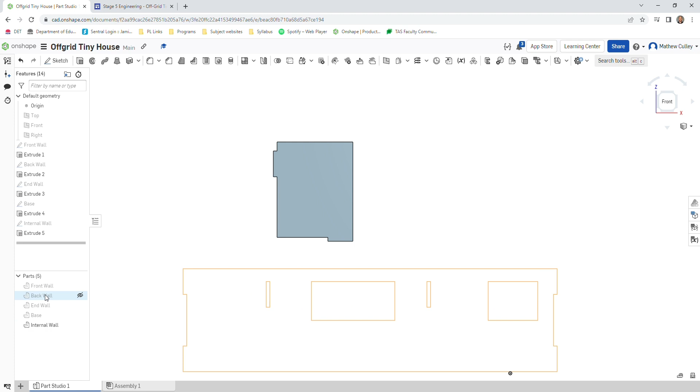So you can see our 5 parts here: our front, back, end walls, our base, and our internal walls. We're just going to come over to our assembly studio down the bottom here and left click once.

Okay, we need to insert our parts first so we can assemble them. So left click on insert. I can select these parts individually, or I can select my entire part studio. So I'm just going to left click once on part studio and bring all my parts over here to the work plane.

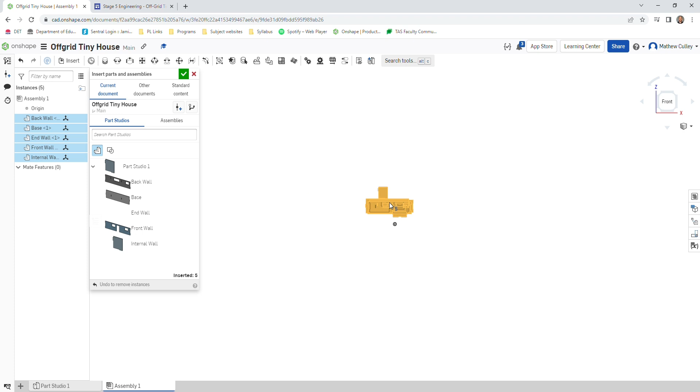Okay, zooming in. Now it's given me one of everything, and they're all stacked on top of each other.

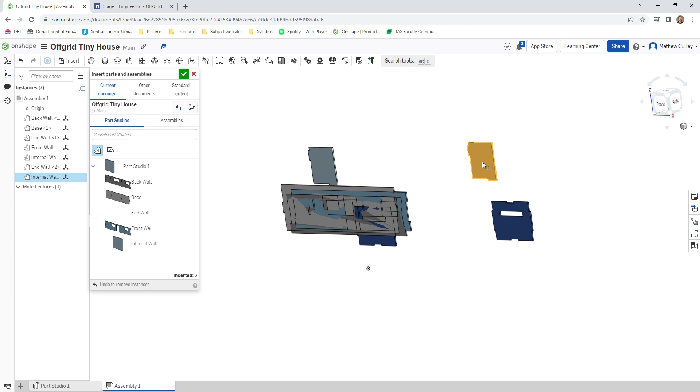We need to add in an extra end wall because we need 2 end walls. So I left click on that once, left click over here, and I need one more internal wall. So left click and left click again. I can now click my green tick, and I now have all my parts necessary for my assembly.

To fix this up here, all we need to do is click and drag on each individual part just to separate all those pieces. Okay, and now we're ready to start assembling.

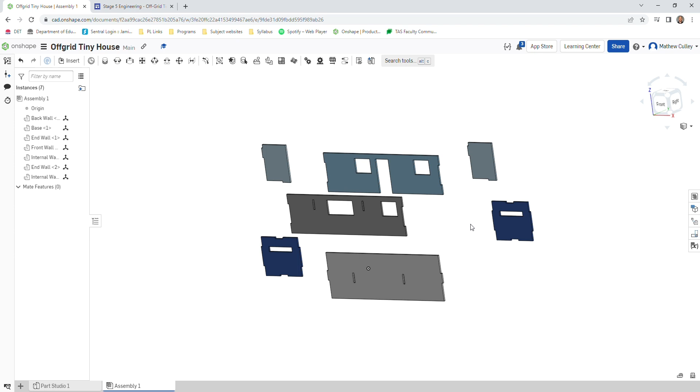Before we start joining all the pieces together, it's good to get everything into a rough orientation. So we need to turn our end walls around so they're facing the right way. If I just left click on one of my end walls, you can see it brings up these arrows and these direction tools. So I want to rotate my wall around this way.

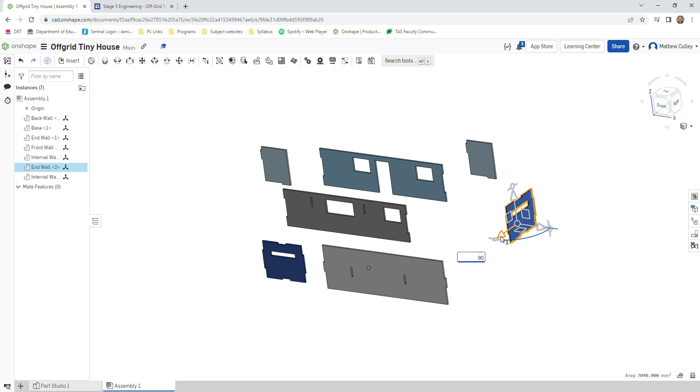I will left click and hold on this little circle here, rotating around. Now you can see it gives me the degrees. I want to rotate 90 degrees. Now if you can't quite get it on there, that's okay. If I just release my left click and press 90 degrees and hit enter, it will snap it into position for me. Left click away, and there we have it.

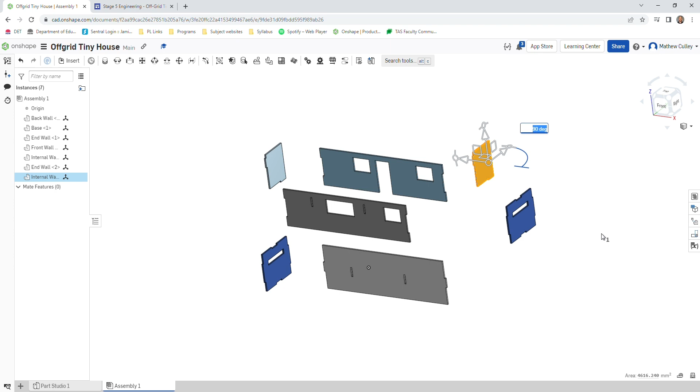I will do that for the other end wall, and the same thing with my internal walls. Okay, and then my base here, just going to rotate around 90 degrees, and I'm ready to start to assemble.

So we're going to use a series of fasten mates which can be found up here on the toolbar, or M is our shortcut for our fastening mate. So first joint we're going to join this corner, this end wall to our front wall.

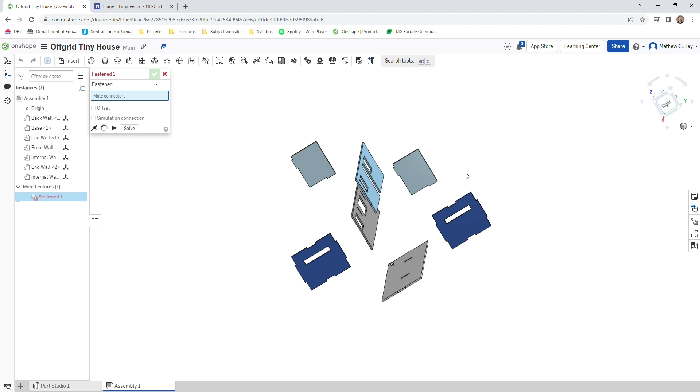So I'm going to zoom right in here, double click on right, zooming in on this corner, and you can see my axis coming up, so the blue, red and green lines. I want that blue axis pointing upwards, so left click while it's pointing up, zoom back out.

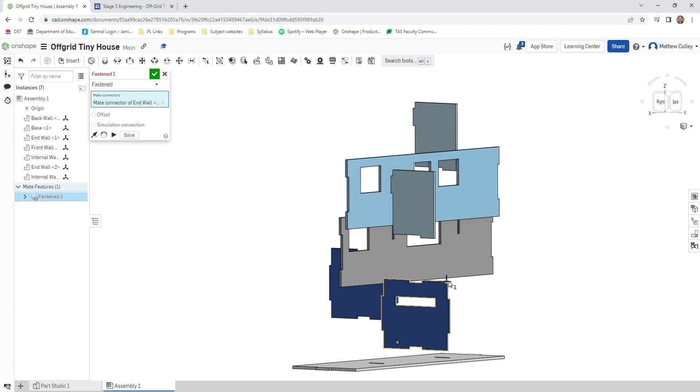And I'm going to join it onto this corner here of my front wall. Left click. Okay, and you can see that it starts to pull the part into place. Now I'm happy with that, so I'm going to click my green tick to solve that.

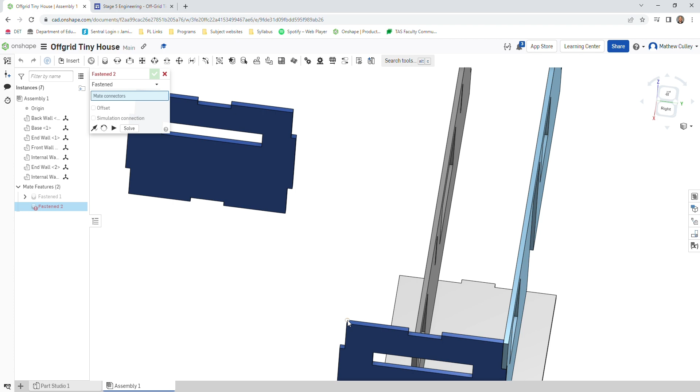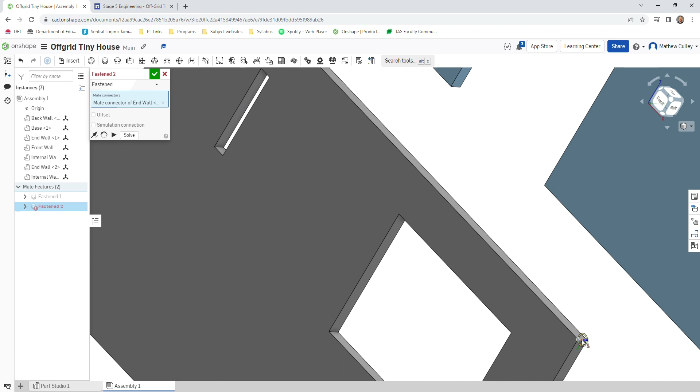Now the assembly studio automatically moves on to your next fasten mate. So what we'll do is we will fasten this corner here to our back wall. So I'm holding down my right click and dragging to rotate my workspace. Going to zoom in on this corner here, blue axis pointing upwards, left click once, and I want to get this back corner of my back wall, left click again.

Okay, now you can see that that is overlapped, because I needed to select this corner here, but that's okay because what we can do is start to offset, and I'm going to show you how to use that tool so it puts that wall in the right position. So if I come over to my offset button here, I'm going to offset along the red axis.

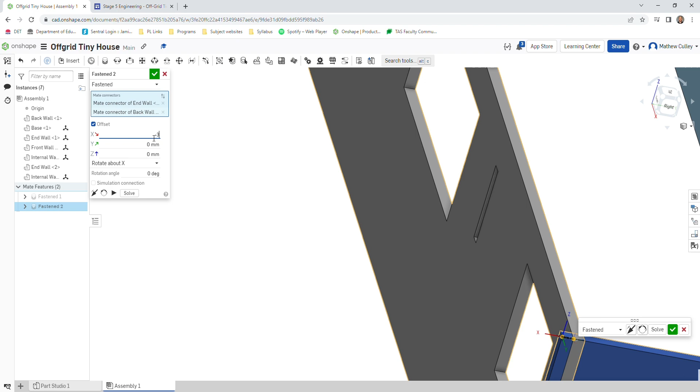Okay, remembering our wall thickness is 3 millimeters, I'm going to type in 3 and hit enter. Okay, it's pulled the wall the wrong way, so let's do -3 and send it back the other way. Okay, and we can see now that that end wall is in the correct position. So green tick to solve that.

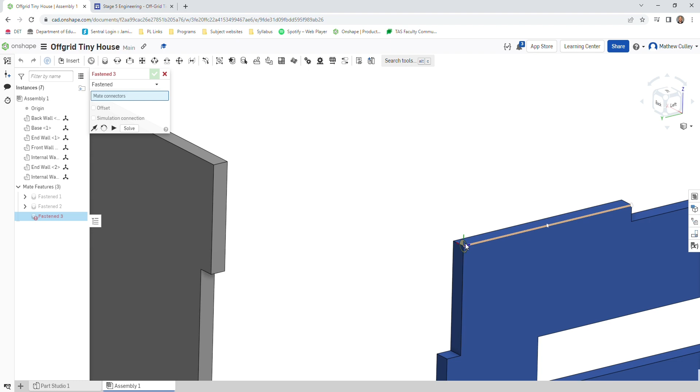Okay, and we have one end of our tiny house completed. We'll repeat those steps for this other end wall. Blue axis pointing upwards. Happy with that. Okay, and it's starting to come together.

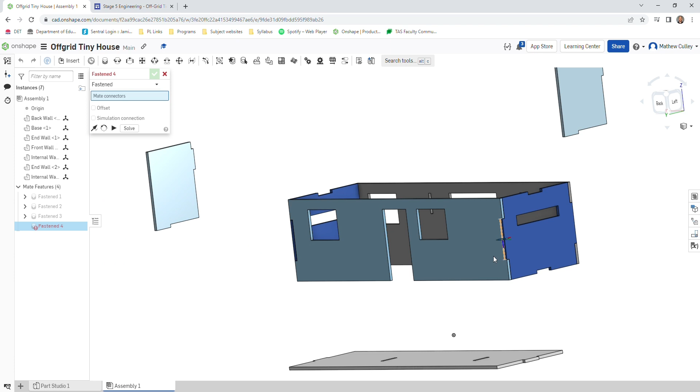Next thing I'm going to do is insert my base into the bottom of my house. So zooming out and rotating around by holding the right click. Zooming in, and we will grab this corner here. With our blue axis, it's going to go along that edge.

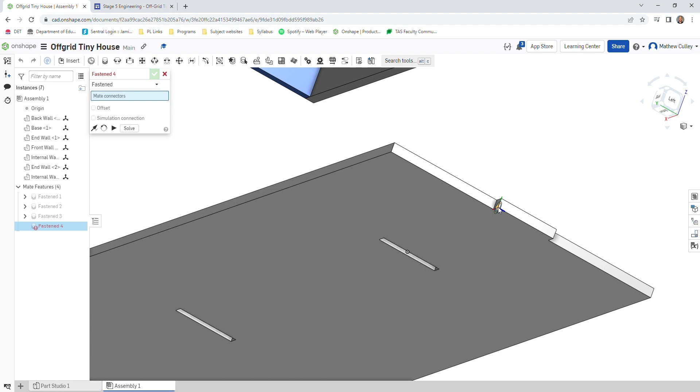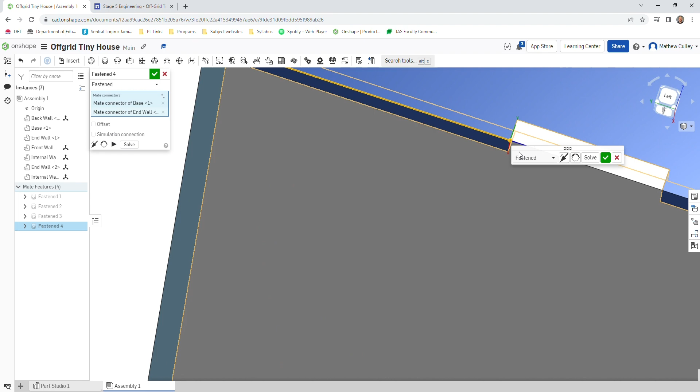And we are going to join that into here. So we want our blue axis going horizontal, not vertical. And there we have our base in position. Okay, and we can start to see our tiny house coming together.

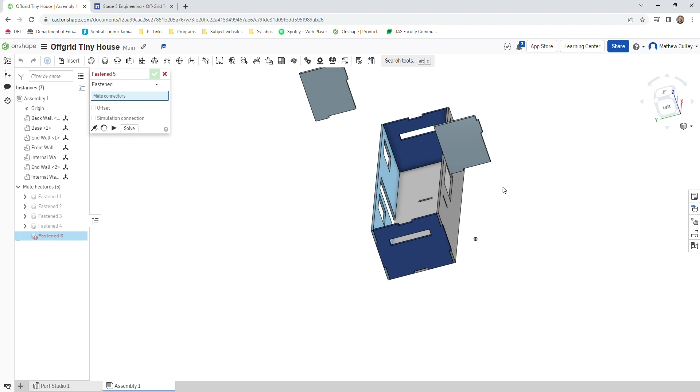So now we need to fit in our internal walls. So this internal wall here, this is going to slot into this place here. So I'll rotate around to the back. Zooming in, we will connect this corner here. Blue axis pointing upwards.

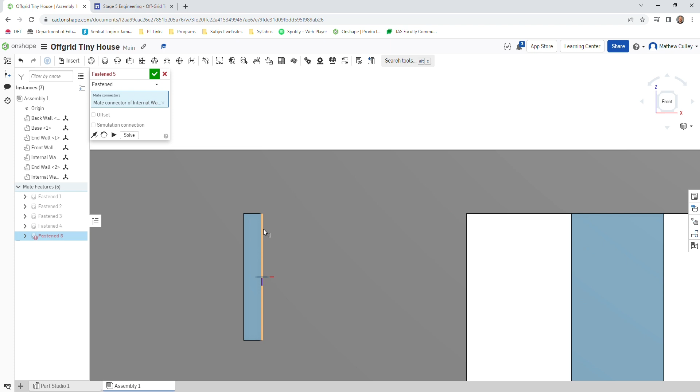Zooming back out into this corner here. So just going to rotate around. And there we have it, locked into the wall there. Repeat that for the other internal wall.

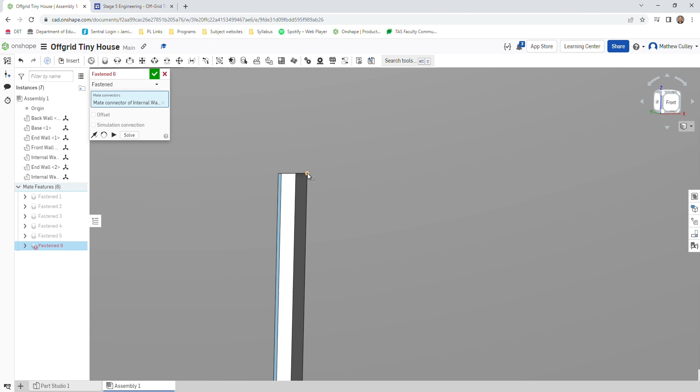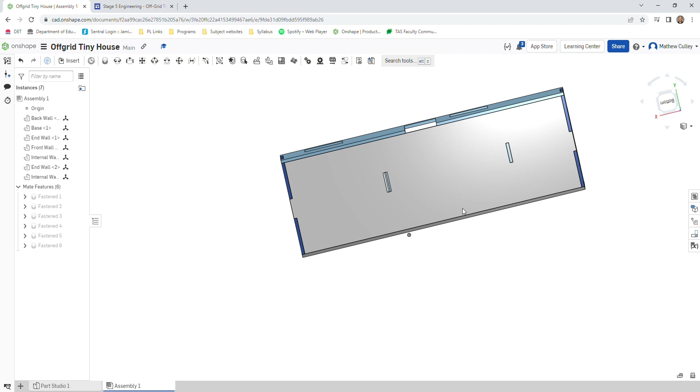And solve. Okay, we now have our internal walls inside our tiny home. One last thing we need to check is that our internal walls are locking into the base. Now we can see here something isn't quite right with the base. Okay, our internal wall isn't lining up.

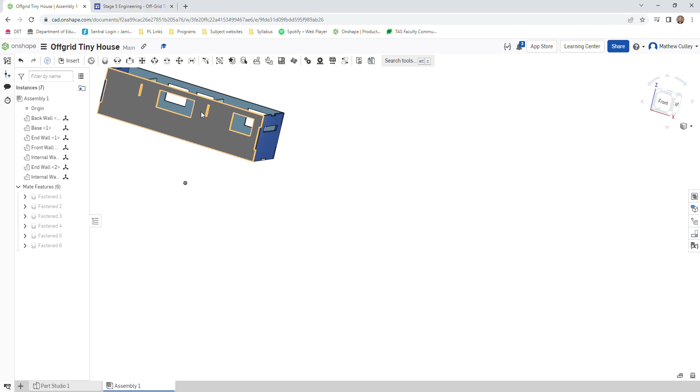So what we need to do is we need to go back to our sketches and check our drawings. The first thing I'm going to start with is our back wall, because there's a lot more geometry on there that can sometimes conflict with all our other window geometries. So we'll go back to our Part Studio, open up the sketch for our back wall by double clicking.

Okay, and it's this slot here that seems to be in the wrong position. So I'm going to left click on this point here. I'm going to come across and left click on this point here. And that's telling me that it is a distance of 101.49 millimeters. Now that should be 100.

So to fix that, what we're going to do is go up and use our dimension tool. So left click on dimension. Left click on those 2 points again. Bring that up the top here. Left click. We're going to type in 100 and hit enter. And just solve that sketch.

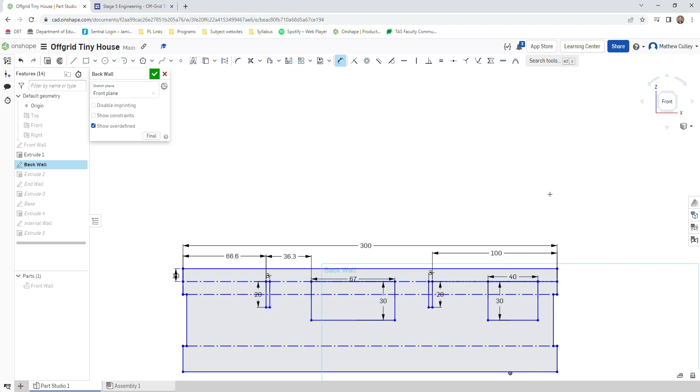Now we're going to return to our assembly and see if that has fixed up our problem. And there we have it. We can see our internal wall is connected into our base and into our back wall there.